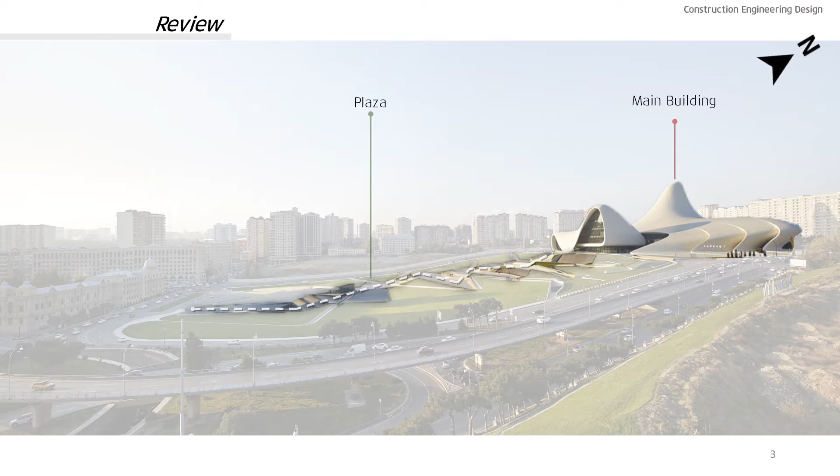The basic idea underlying the design of the Heydar Aliyev Center is that the main building develops its form from the plaza in front of it. Architecturally, the plaza is divided into strips running from east to west as shown in the highlighted areas across the graphs. These strips start on the ground as a walking surface, then wrap upwards around the main building to create the well-known free-flowing 3D shape that we've studied.

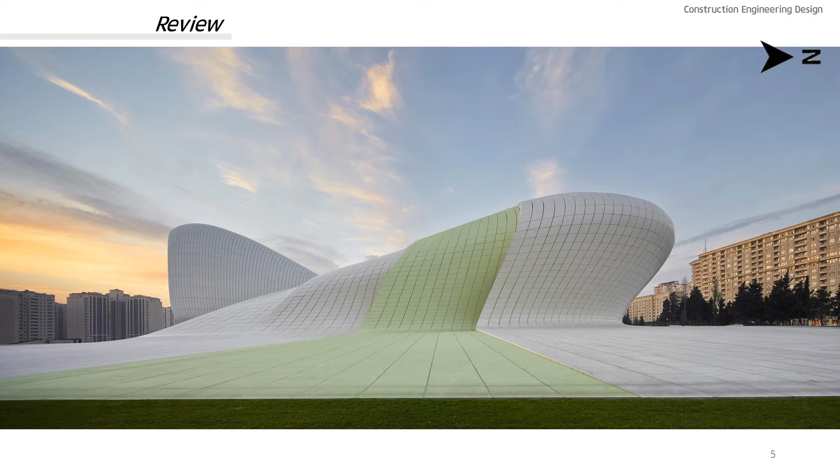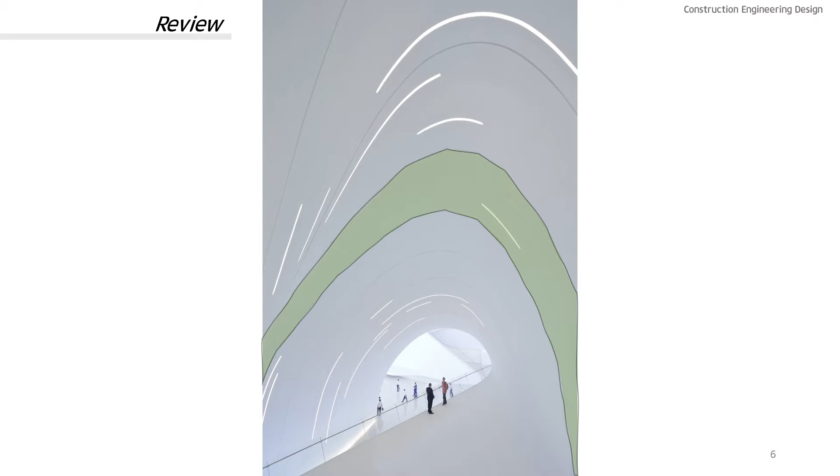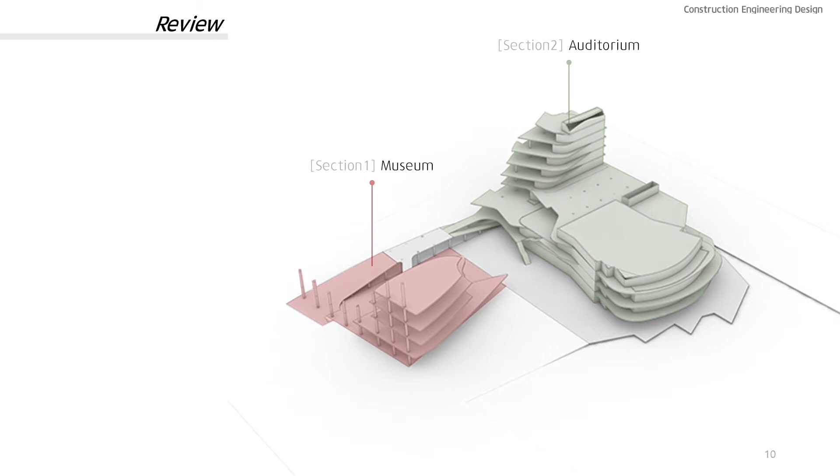In addition, this geometry of the building envelope is reflected in the interior wall of the building as well. This picture shows the curves of the envelope on the interior roof in a hallway. This picture shows the curves of the envelope in the auditorium. The entire building can be subdivided into two areas: Section 1, the museum side, and Section 2, the auditorium side. The auditorium area contains the auditorium itself, a library, and a multi-purpose hall.

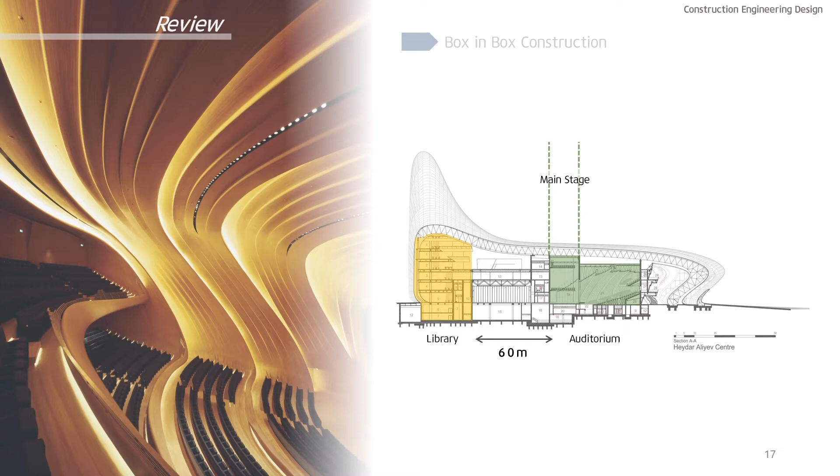Up until now, we have studied the GFR panel material and the steel space frame structure used for the free form of the building. Last week, we took a look inside the building and looked at the construction of the auditorium. The auditorium had to carry out two missions to play its part in the building. First, we saw how it enabled concerts next to quiet interior spaces, using the sound isolation noise control method known as box-in-box construction.

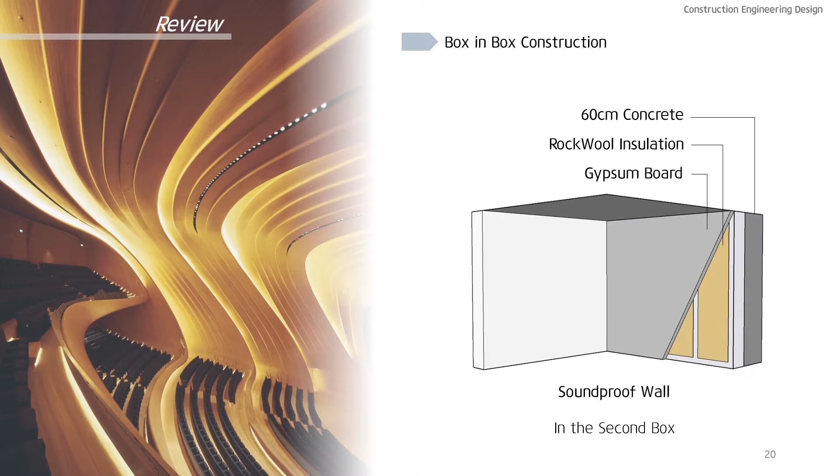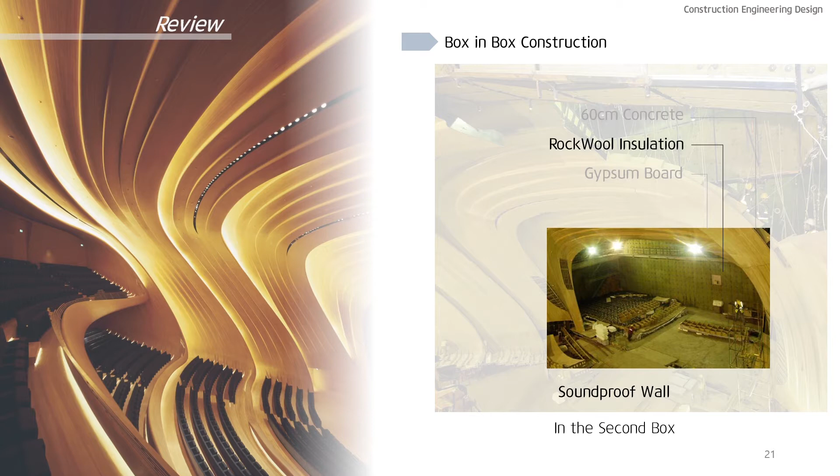Inside the building, they added concrete walls as thick as 60 centimeters and added 1,200 square meters of layers of rock wool insulation. Inside the new box, architects wrapped the floor, walls and ceiling with more than 280 interlocking oak panels.

Next, they had to support various activities including speech, orchestra, and opera. Because each of those different kinds of performances have different acoustical needs, the introduction of coupled spaces was put into the project. Designing a coupled space hidden above the ceiling, 4 meters of additional room is used to modulate the reverb that is created when sound is made on stage of the auditorium.

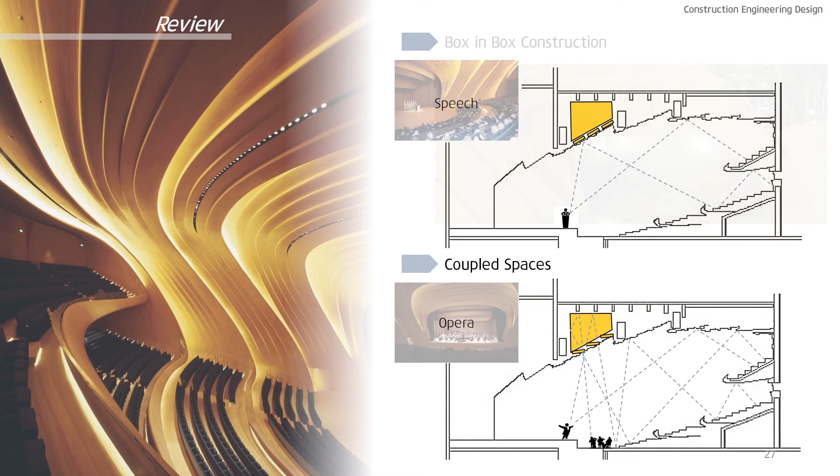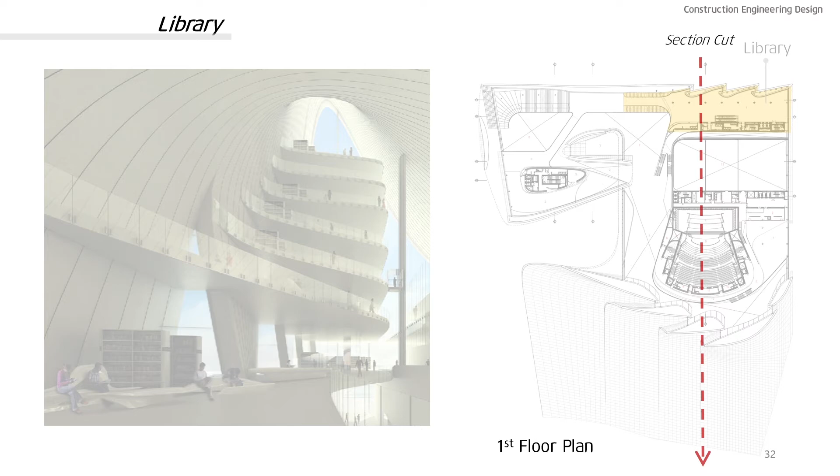Today, we will introduce some interesting things about the library. On the north side of the building, we can find the library with its own entrance. This is used for daylight control. Let's take a look at the cross-section of the floor plan through the library. This part of the building is 6 floors tall, containing multiple archive floors stacked above the library. The floors are connected by ramps that create a continuous path of circulation.

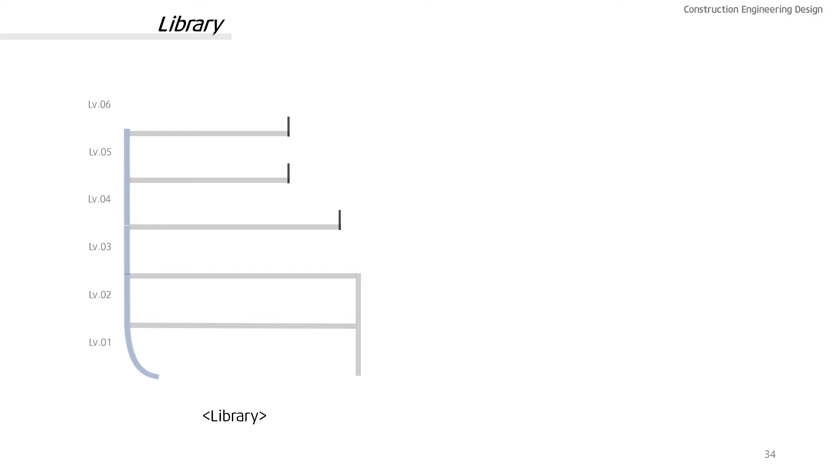In addition, the conference hall is connected to the library by a bridge that creates the perfect inclination for the auditorium seating. The screen is a facade on the north side of the building where the library is located. Because the library is located adjacent to the side surrounded by glass windows, it uses natural light during the day and self-lighting at night to light the zones.

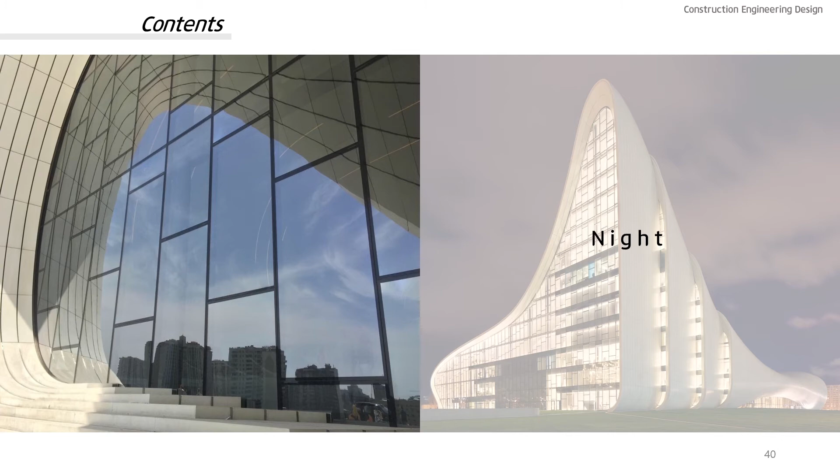Thus, the Heydar Aliyev Center uses two methods for lighting. One is the curtain wall system for daylight, and the other is the wall-fixed LED luminaires. From today on, we'll present the natural lighting method of the building around the glass curtain walling located in the library. We will be looking at the system structure and unit analysis of the glass curtain wall, and proceed with the order of assembly.

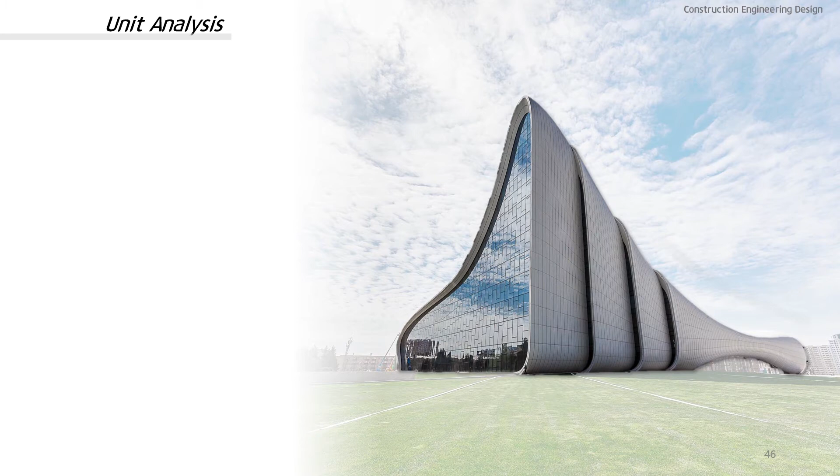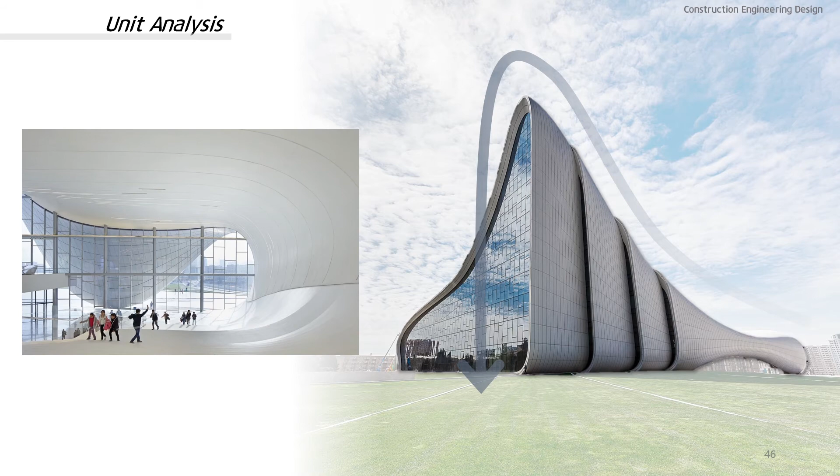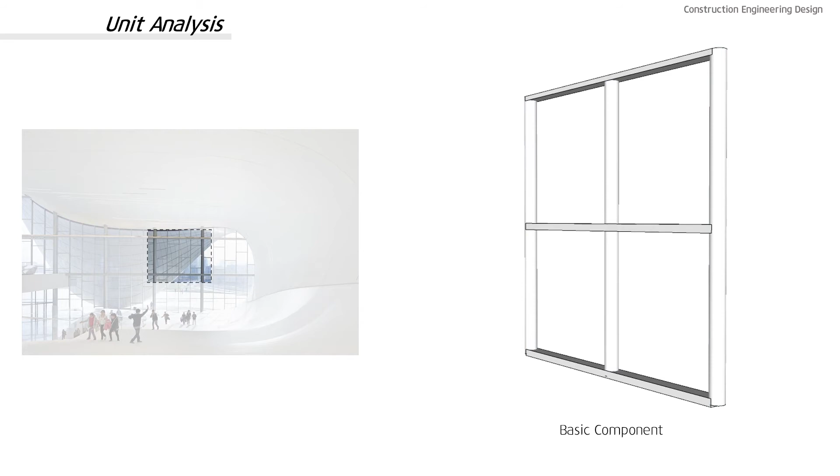Beginning with the unit analysis, the curtain wall system was adopted where it was not covered by panels to illustrate the continuous and sleek facade while ensuring a clear view for the natural lighting to pass through. It literally takes the form of a curtain-like window. On the main concrete structure that consists of concrete columns and beams in a grid, horizontal and vertical spanning members of a frame are connected. These horizontal and vertical members are called transoms and mullions.

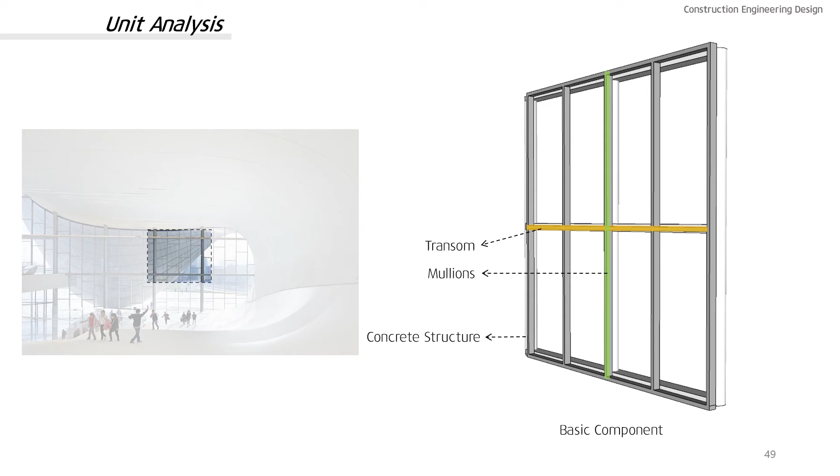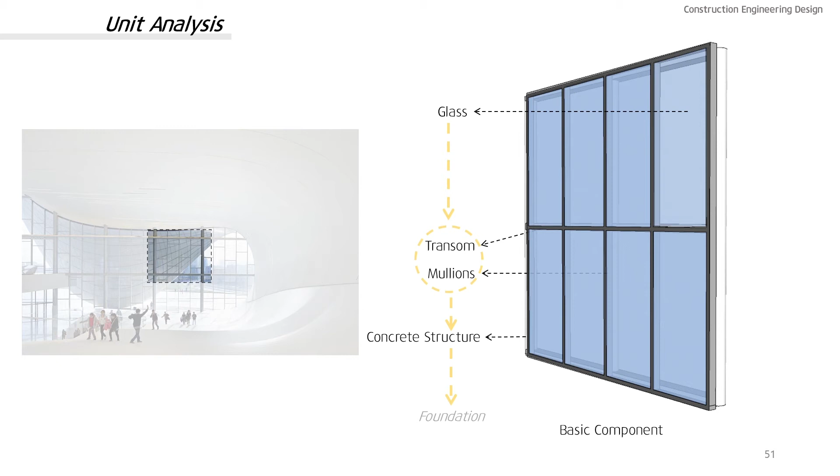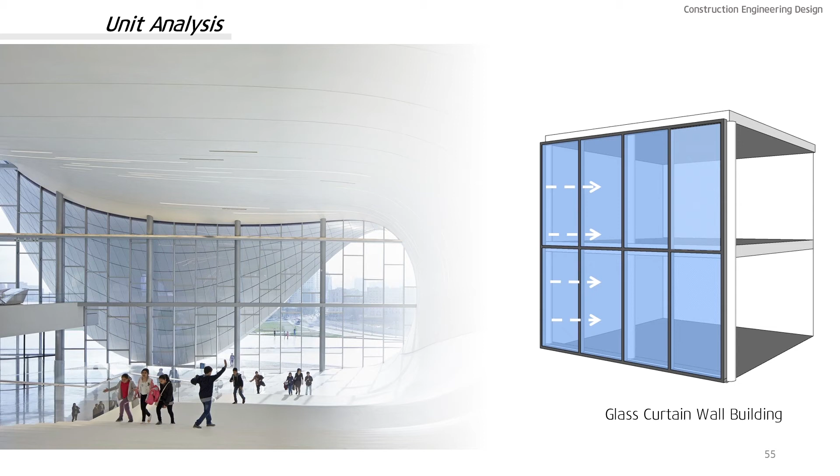The glass is then inserted into the frames, and the transoms and mullions play an important role in transferring the load of the glass facade to the main concrete structure that it is attached to. In this building, the glazed curtain wall is the window to the cultural center. The glass curtain walling is a building envelope that is intended to only support its own weight and withstand the effects of environmental forces such as wind or earthquakes. As a result, it is not intended to assist the structural integrity of the building.

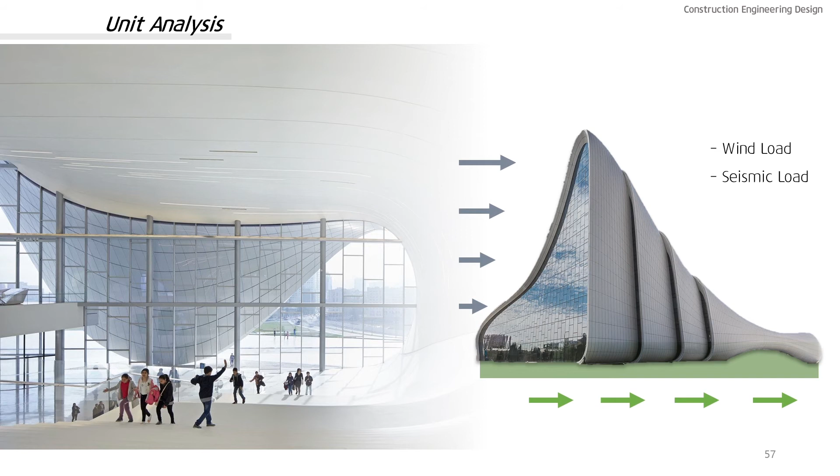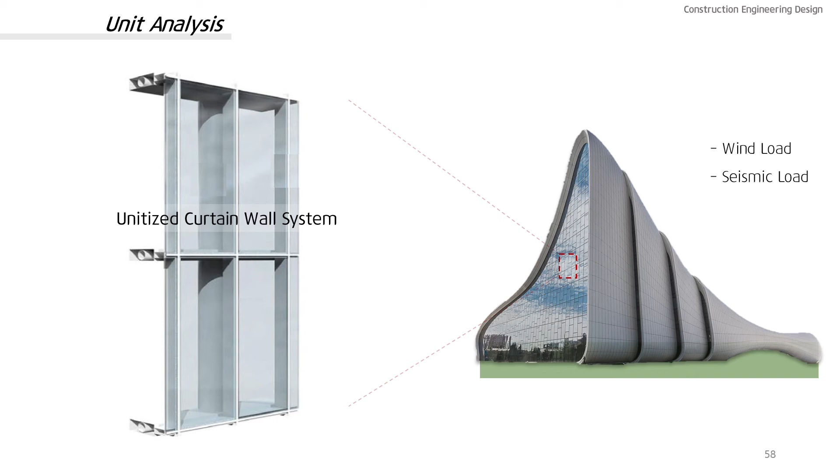The Heydar Aliyev Center has to accommodate the horizontal interstory drifts due to wind and seismic impact. Owing to quality and interstory drift considerations, it was decided to use a unitized fixed glazing curtain wall system, with adapter frames bonded to the inside by means of structural silicone adhesive. There are two main types of curtain walling construction, stick and unitized. The differences depend on the method by which the components are assembled.

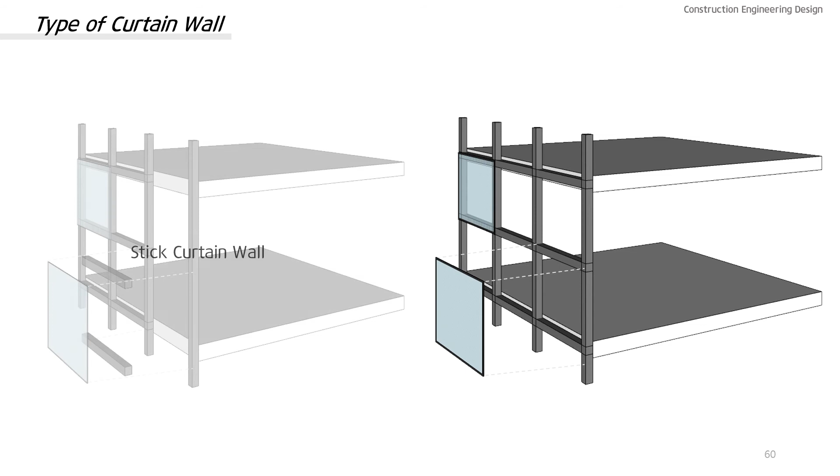In the stick curtain wall construction, the components are assembled piece by piece on the site. On the other hand, in the unitized curtain wall system, the parts are already assembled in the factory. The components are installed and brought as a single unit from the factory to the site. The complete assembly of the units in the factory brings some benefits: improved quality control, quicker installation that requires less manpower on site, and also it can be installed from the interior of the building, which is ideal for high building sites.

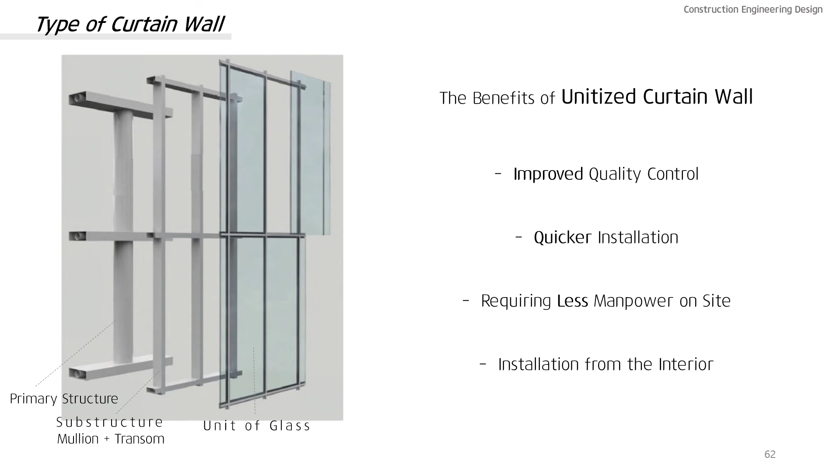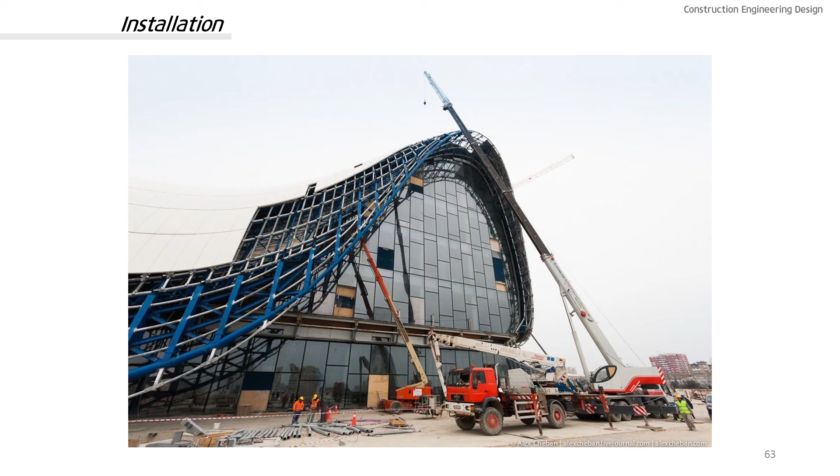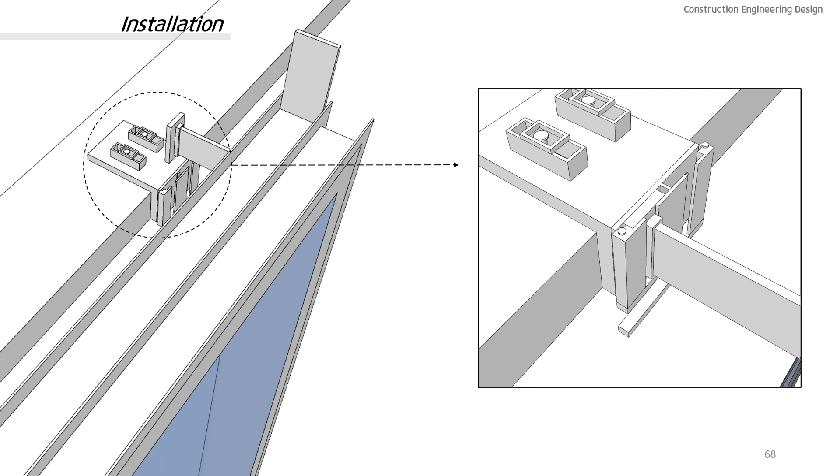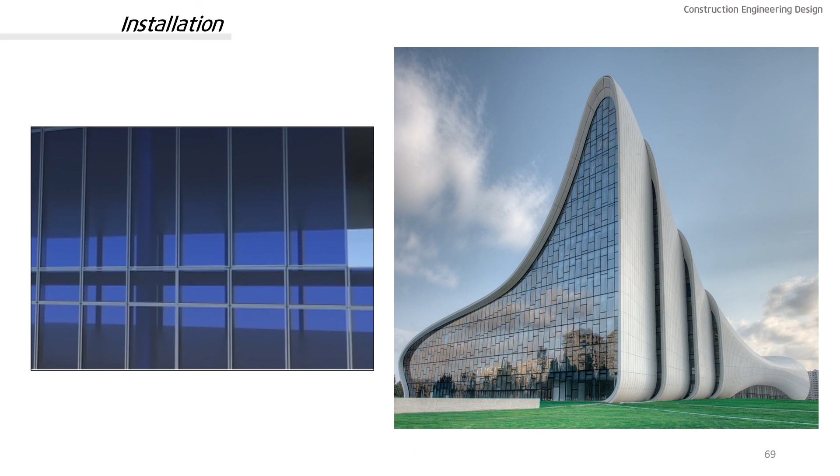Unitized curtain walling can be installed either from the interior of the building using a beam on the floor above, or from the outside using a crane. The glazing units with these frames are attached to the split mullions and split transoms of the facade units by screws concealed by metal caps. Each unit or facade panel is suspended from its top. This support provides sufficient flexibility to accommodate tolerances, thermal and structural movements, and especially the critical in-plane earthquake shear effects. This is the end of the presentation.